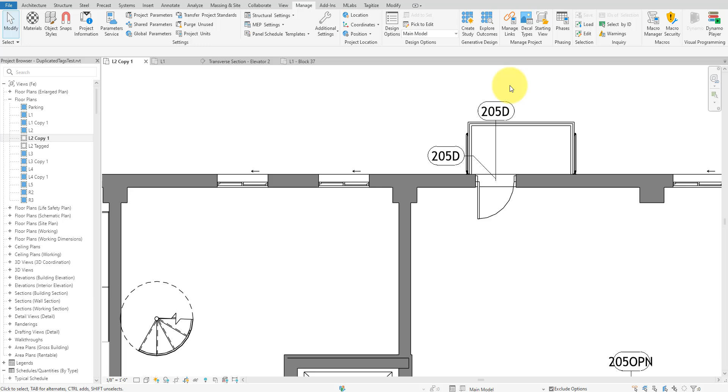If your Revit model has lots of duplicated tags, it can take a lot of time to clean them up. For example, each of the doors of my model here has multiple identical tags. Of course, it's easy to delete some tags so that there's only one left for each door. However, I really don't fancy doing the same thing over and over again for the other 100 doors.

This is exactly when Dynamo comes in handy. I can just open this small Dynamo script here, run it, and voila, all duplicated tags have been removed in a single click, leaving each door with just one tag, and life is beautiful again.

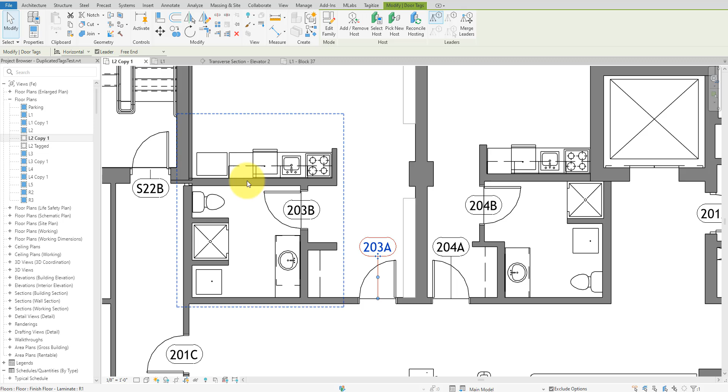If you, however, want to learn to code this yourself, let me show you how right now, step by step.

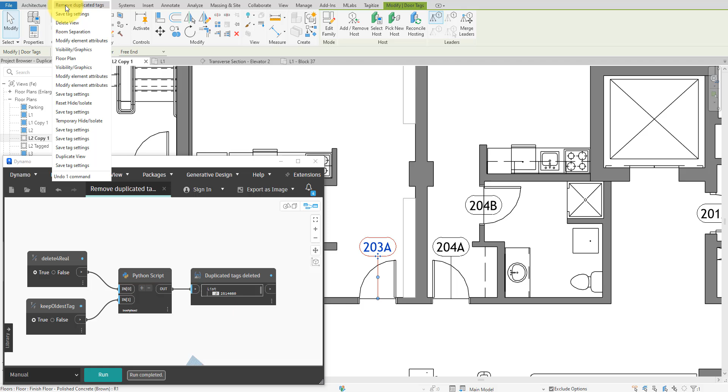To start, let's create a new script in Dynamo. I will now add a Python node to the graph and open it for editing. However, this is not a good script editor, so I'll type the code out in Visual Studio Code instead and copy it back into Dynamo at the end.

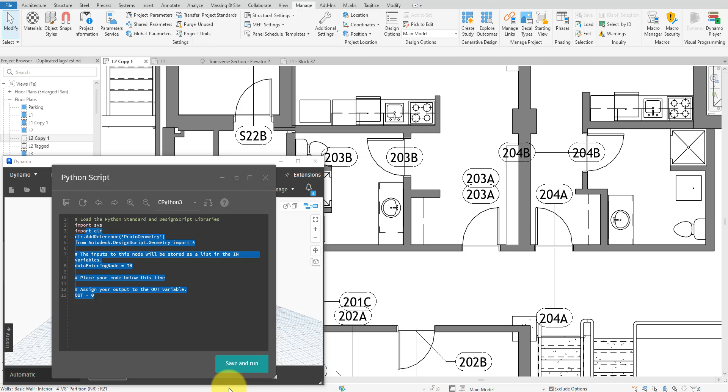If you're new to this workflow, don't worry. Just find in the video's description below a link to my other tutorial on how to set up this coding environment. It will also provide you with this Python template for Dynamo. That will give you all the necessary information to then return to this video and start scripting with me.

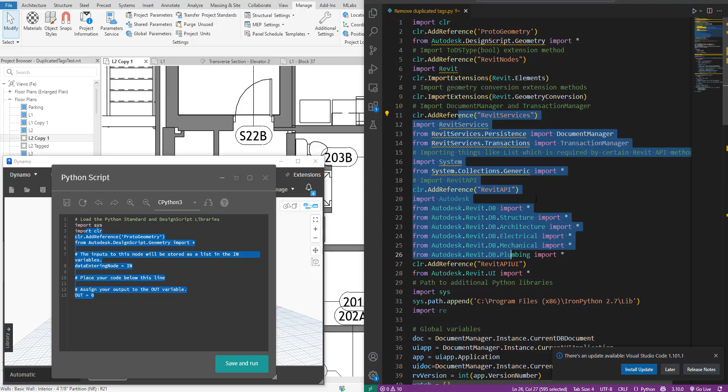To begin, let's create a custom function to extract the integer value of a Revit element ID. We will need this in a minute. We will check if the current model is in Revit 2024 or later. If true, we can read the Value property of the ID and return its value. Otherwise, we'll read the legacy IntegerValue property instead.

Next, let's import the two inputs we will feed into this Python script. They are both Boolean inputs. The first one is for us to say if we really want to carry out the removal of duplicated tags. This is because deleting things can be dangerous, so we'll first run the script with this input set to false and review the list of tags it wants to delete. If that looks fine, we'll change the input to true to perform the actual deletion.

The second input will determine which tag the script should keep for each host. If it's false, we want to keep the last created tag of an element. If it's true, however, the script will keep the tag first created for the same element. Next, we will create this dictionary to help with grouping tags by their hosts. The dictionary's keys will be tag hosts, and the values will be a list of tags for each host.

Now, it's time to start looping through all independent tags in the model's active view, like this. For each tag, let's check if it's orphaned. If so, we'll need to skip it because we won't know which element is associated with the tag anyway, so let's just keep it to be safe. For a valid tag, though, let's loop through all elements it references. For each element, this loop will provide the LinkElementId object. Let me call it linked ID.

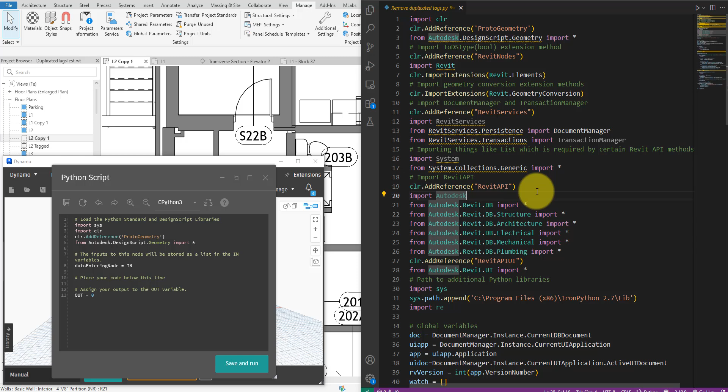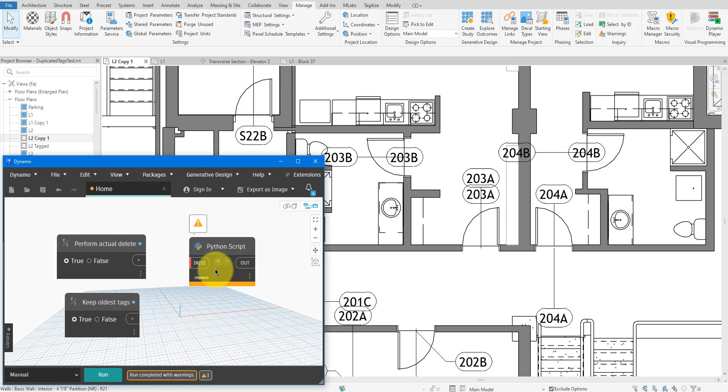Next, let's copy all text from this file, paste it into the Python node in Dynamo, save it, and close this node. We also need to add two Boolean input nodes. Let's call the first one perform actual delete. We'll only set this to true if we really want to get rid of any detected duplicated tags. For the second node, I'll call it keep oldest tags. I'll set it to true for now to delete all duplicated tags in each group, except for the first one ever created in this model. We can now connect both inputs to the Python node.

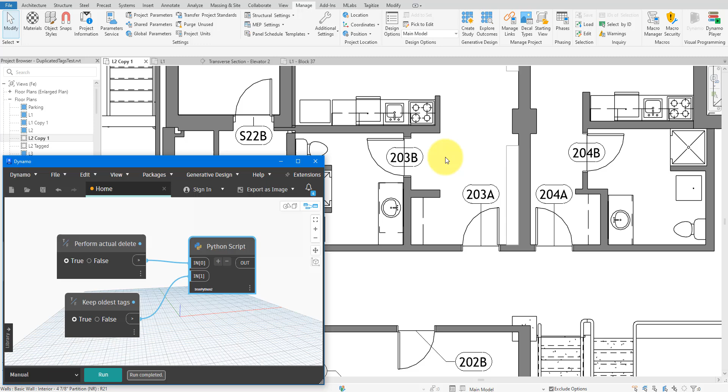Last but not least, I'll change the Python version here from version 3 to version 2. This is because my Python script in Visual Studio Code was written in this lower version. With that, our Dynamo script is finally complete. Let's now run the script to see it in action. Alright, it has worked beautifully, just like before.